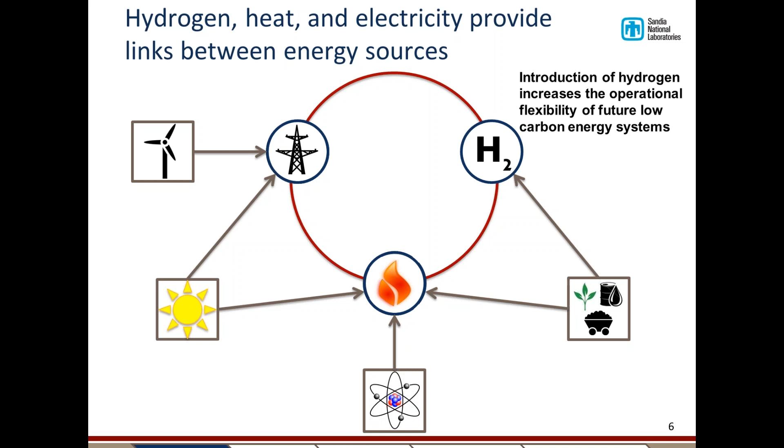The focus of the current analysis is on hydrogen and electricity production from solar energy in the form of heat. So we will be considering cases in which solar energy is collected and converted into heat, and that heat is subsequently converted into either electricity or chemical energy in hydrogen molecules.

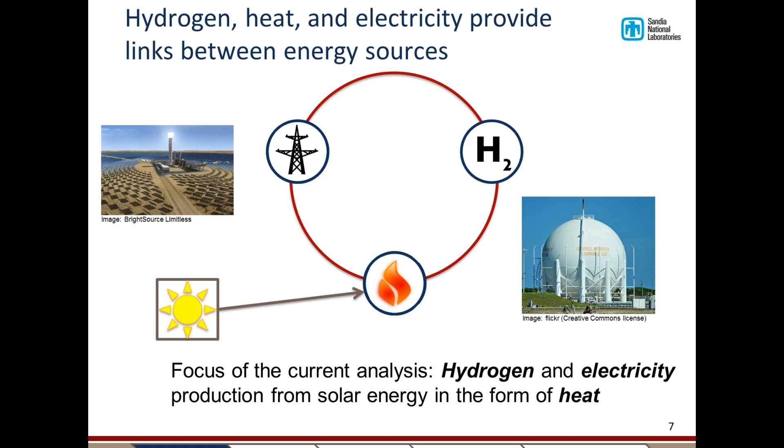As you've already heard, our primary goal was to explore pathways for integrating concentrating solar power and solar hydrogen production. And the key question here is, do synergies exist that could reduce cost? The scope of the analysis was limited to process-level integration of concentrated solar power, which I'll refer to as CSP from here on out, and hydrogen production.

So for example, we did not consider the use of hydrogen for energy storage at a CSP plant, and we also did not consider potential impacts beyond the plant gate, such as changes in hydrogen transportation costs.

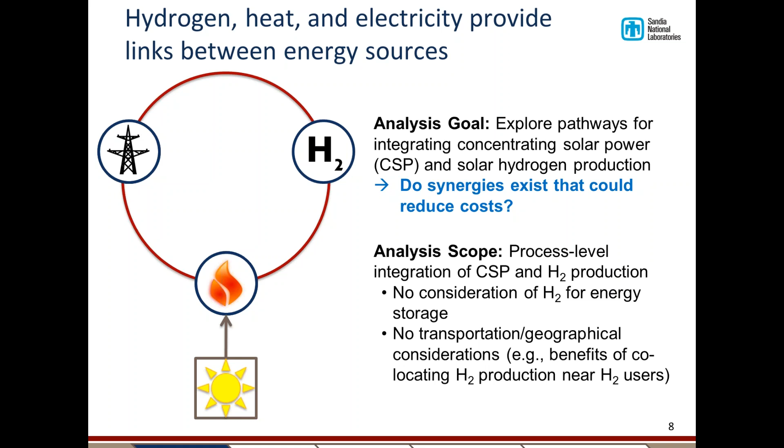This was meant to be a preliminary look at integration of CSP and hydrogen production, and relied heavily on previously published analyses in those areas. On the CSP side, we used published reports and cost and performance models developed primarily at Sandia National Laboratories. These include power conversion calculations and reliability analyses, and capital and operating and maintenance cost estimates.

Some of the key outputs of these analyses are estimates of the levelized cost of electricity from CSP, both for the current state of the technology and for future performance targets. On the hydrogen production side of things, we relied on DOE hydrogen production models, which present discounted cash flow analyses based on conversion efficiency and capital, O&M, and materials costs, with the primary output being the cost of hydrogen per kilogram. These are the DOE H2A models.

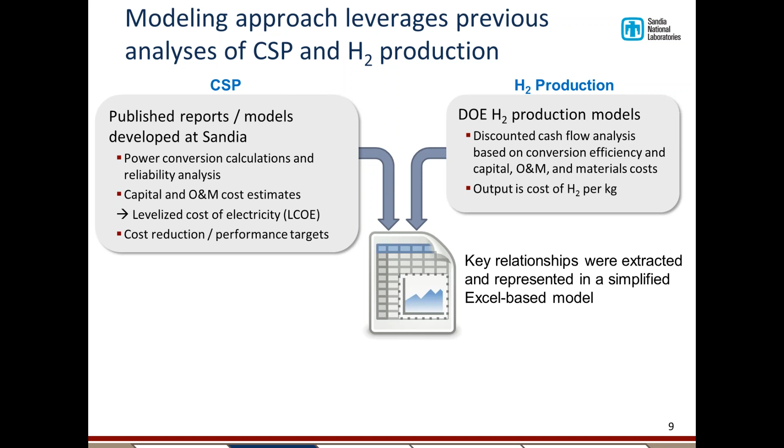In order to conduct our analysis, key relationships were extracted from these documents to construct a simplified Excel-based model of each potential scenario integrating CSP and hydrogen production. Our objectives were to identify important performance drivers and fundamental conditions that favor the integration of CSP and hydrogen production, and to understand the key uncertainties such that we could draw some robust conclusions.

I just want to emphasize that our objective was not to conduct process optimization, as our modeling was conducted at a fairly high level. That being said, I will be showing cost estimates later in the presentation, but I would urge you not to focus on the absolute numbers, but rather try to notice the underlying trends and the conclusions we can draw from them.

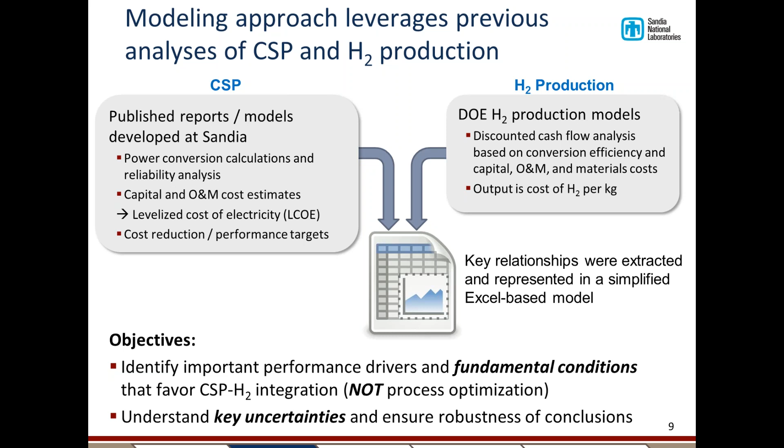Now is a good time to emphasize the fact that we did not make any judgments or assessments of the performance or cost of any components of either CSP or hydrogen production processes. All of the performance and cost estimates were taken directly from the documents mentioned on the previous slide. We simply combined these estimates to analyze potential costs for an integrated facility.

So for hydrogen production, we use estimates from the DOE H2A models, and in particular the future central hydrogen production models, which feature startup years between 2025 and 2030. So again, in the future.

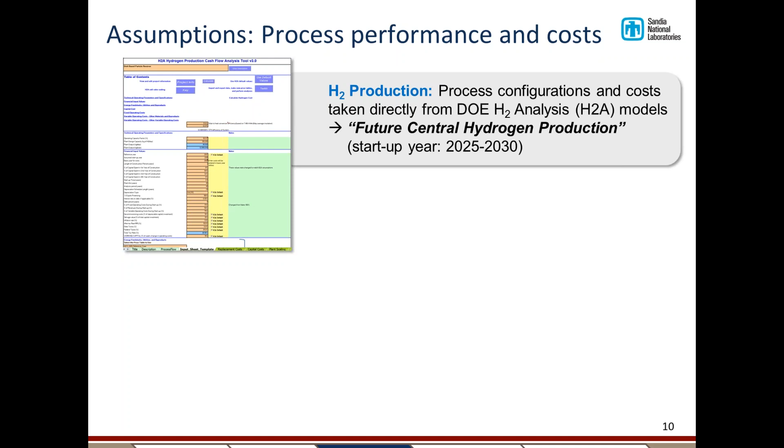For CSP, we used estimates taken directly from DOE and Sandia reports outlining DOE targets for CSP in 2020 under the Sunshot program. Note that for both hydrogen production and CSP, the assumptions are based on future systems projected out to high volumes where economies of scale have been achieved and cost reductions and performance improvements have been realized beyond the current state of the art.

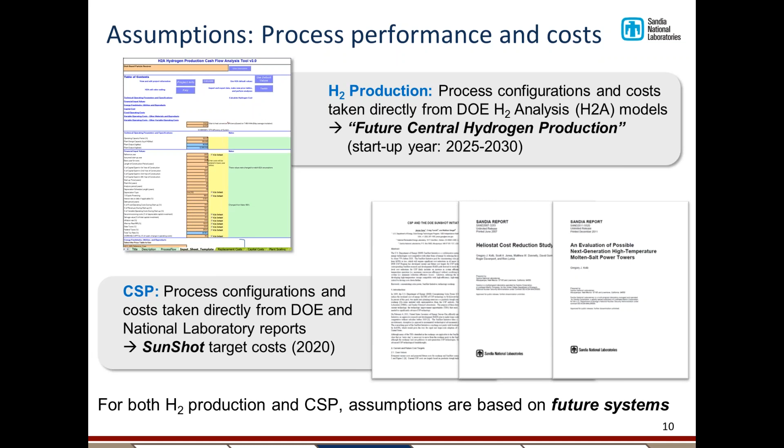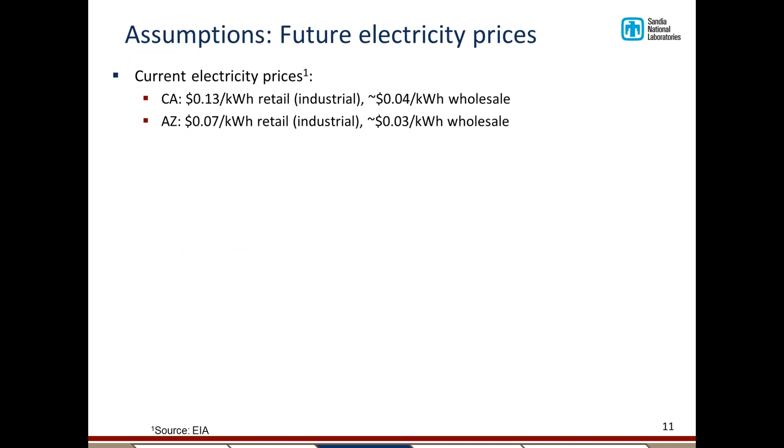As we'll see, another important assumption we'll need to make is regarding the price of electricity. According to the Energy Information Administration, current electricity prices in places with adequate solar resources are somewhere between 7 and 13 cents per kilowatt hour for retail industrial customers, and 3 or 4 cents per kilowatt hour on the wholesale market.

But as we discussed on the previous slide, we're interested in the price of electricity up to a decade or more in the future. And even though solar PV prices have come down substantially over the past few years, there are several factors that could lead to higher electricity prices going forward.

One is potential increases in natural gas prices. With the retirement of many coal-fired plants, the share of natural gas in overall electricity generation has increased, and natural gas prices have historically been fairly volatile. So the stable prices offered by solar electricity technologies could potentially be attractive in this situation.

Another factor is legislation that has been introduced to promote renewable and less carbon-intensive technologies, such as renewables portfolio standards, cap and trade programs like the one in California, and the US EPA's Clean Power Plan. All of these could increase the price at which renewable power is competitive. Finally, if we focus on CSP in particular, we note that this technology is unique in that it enables some amount of energy storage, which could command a premium compared to other renewable technologies like wind and solar PV.

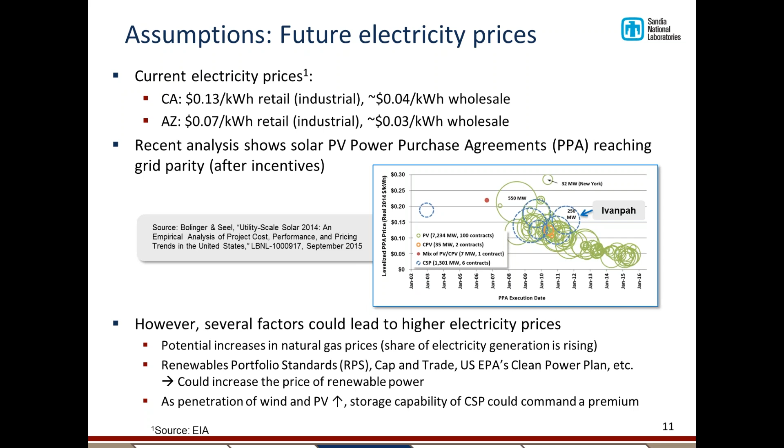The point here is not to conduct a detailed analysis of electricity prices. That's outside of our scope. The goal of this slide is simply to emphasize the fact that future electricity prices are highly uncertain. And because they are uncertain, we treated electricity price as a parameter in our analysis.

So electricity prices enter into our analysis when we consider the electricity being sold by CSP plants and electricity being purchased by hydrogen production plants. We assumed for our analysis that hydrogen plants could purchase electricity at the same price for which CSP plants could sell electricity, just to simplify things.

We also assumed that the CSP and hydrogen production facilities are owned by the same entity, just for our calculations. Our analysis was conducted from the perspective of hydrogen production, so we accounted for the revenue from electricity sales in the calculation of the cost of producing hydrogen. At a very high level, the hydrogen cost was calculated using the expression shown here, and as you can see, the electricity revenue is subtracted from total capital and O&M costs in the numerator.

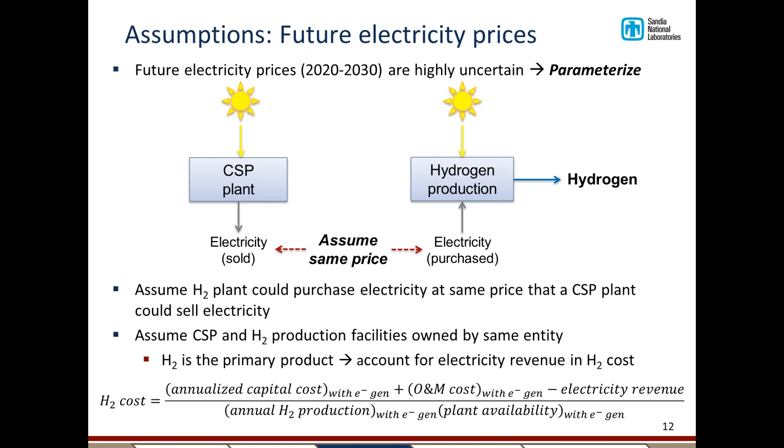Before we get into the actual analysis, I wanted to provide a brief overview of concentrating solar power. For those of you who may not be familiar with this technology, there are actually several different implementations of CSP being pursued, but we are focusing on power tower technology in alignment with the DOE Sunshot program.

Basically, an array of heliostats, or mirrors with two-axis directional control, are used to reflect sunlight onto a solar receiver mounted on a tower. Inside the receiver, heat is absorbed by a working fluid or solid, as the case may be, and transferred to an electricity generation unit. The heat can also be stored for a number of hours if that's desirable.

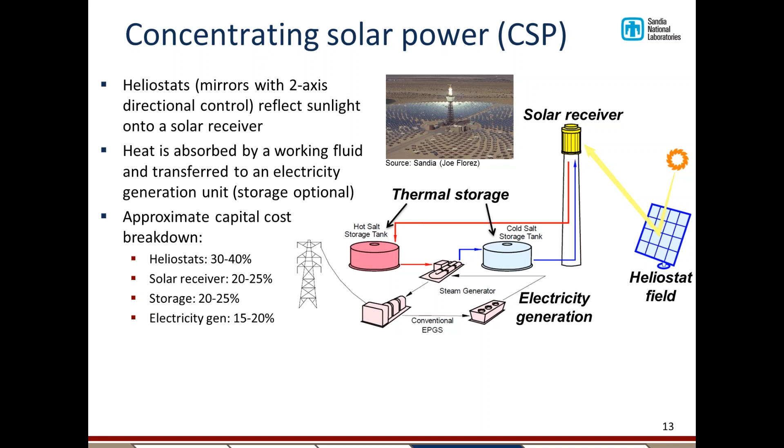If we look at a typical breakdown of capital costs, we see that the majority of costs are for the collection and storage of heat from the sun, with electricity generation equipment accounting for a smaller fraction.

The baseline CSP plant in our analysis is a power tower system with molten salt thermal storage and subcritical Rankine cycle electricity generation. In 2010, a Sandia National Laboratories analysis estimated that the levelized cost of electricity for such a system would be 15 cents per kilowatt hour, and the Sunshot target for this configuration is 6 cents per kilowatt hour in 2020.

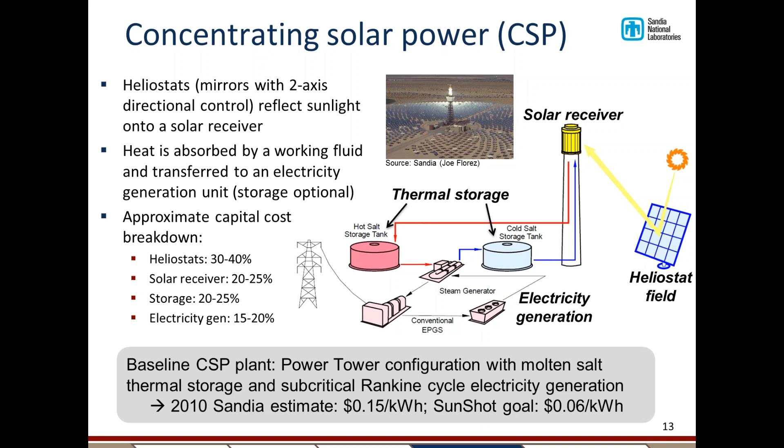We divided the CSP plant into two major units for our analysis. The first is the system that collects light and converts it to thermal energy. This includes the heliostat field, the solar receiver, and thermal storage if it's present. The second unit is the system for generating electricity, including the steam generator, turbine, and cooling towers.

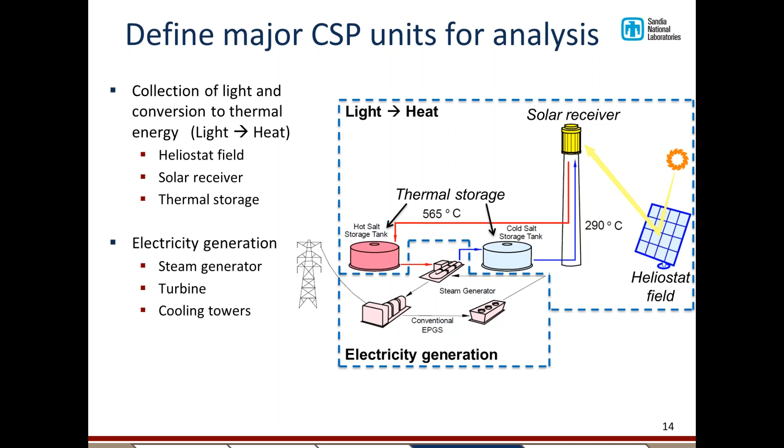You'll see schematic drawings like these throughout the presentation, so just keep in mind that the light-to-heat box here includes components shown in the schematic above. And as I just mentioned, the light-to-heat box represents the majority of CSP costs.

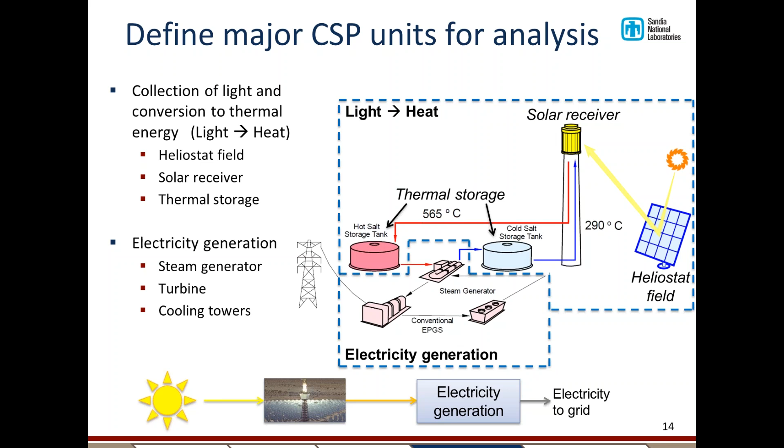So both CSP and solar hydrogen production use heat from the sun, and this heat can be treated as a feedstock in our analysis. The quality of this feedstock is determined by its temperature and also by its availability in terms of thermal storage, again, if it is present.

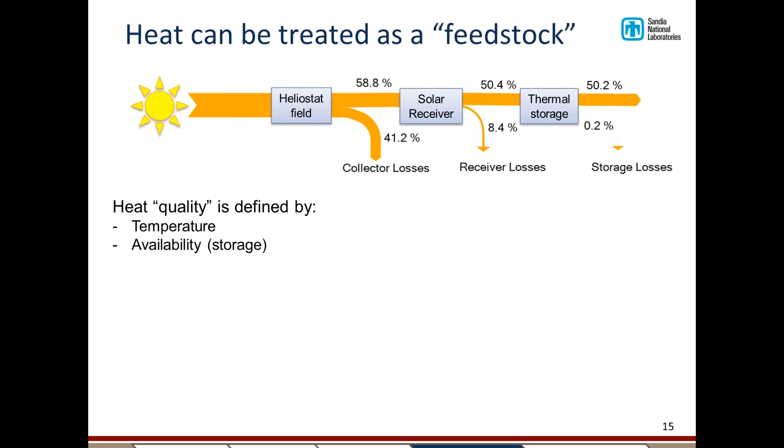The key point here is that as the quality of the heat increases, so does the cost. And this is important because, as we saw on the previous slides, the systems used to collect and store this heat are major costs for solar thermal technologies.

The main reason that the cost of heat increases with temperature is that losses at the receiver become more significant at higher temperature, and that's what's circled up here in the energy flow diagram. In addition, more exotic and expensive materials are required that can withstand the higher temperatures.

So why would we want to go to higher temperatures? Well, at higher temperature, the generation of electricity and the production of hydrogen are both potentially more efficient. So a key trade-off that you'll see in this presentation is that between the efficiency of the collection of solar energy and the efficiency of the conversion of that energy to either electricity or chemical energy in hydrogen molecules.

For the analysis conducted at Sandia in 2010 that I mentioned a few slides ago, they found that the optimal temperature for CSP is 565 degrees Celsius based on their assumptions.

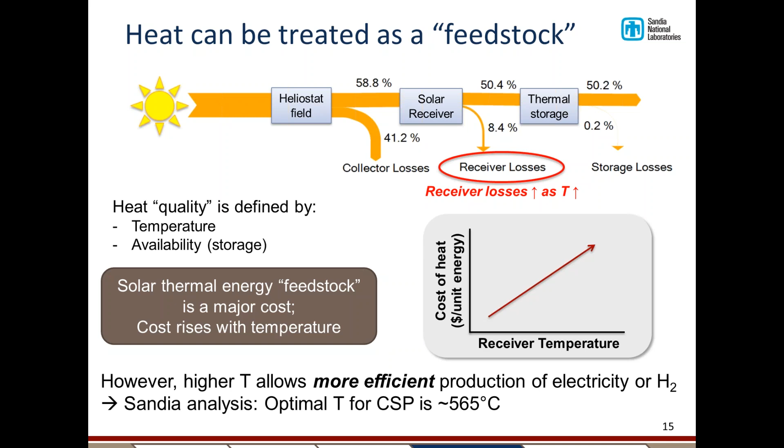As I've said, our goal was to investigate opportunities for integrating hydrogen production and CSP processes in the H2A analyses that were used as the basis for hydrogen production processes. Electricity was purchased from the grid, whereas our analysis considers co-production of electricity from CSP.

Our focus was on process level integration, as I've said. So the key question to ask for each process is, are there any potential synergies at the process level that would make co-location of CSP and hydrogen production attractive? One place to start would be to look for waste heat streams or byproducts from one process that could be fed to the other process.

As we just saw, thermal energy is a major cost, so we focused on integrating heat streams between the two processes.

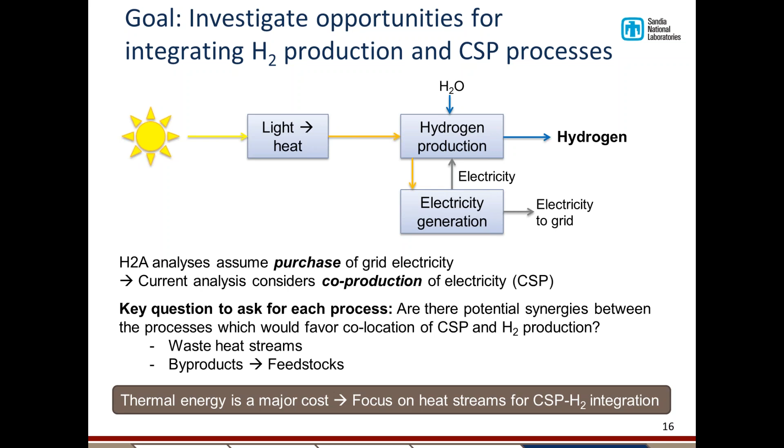Taking a closer look at the electricity generation portion of a CSP process, we see that it yields a few byproducts that could potentially be used by another process. This is a very mature technology with extremely efficient internal heat integration, so waste heat exits the system at a fairly low temperature, roughly 40 to 60 degrees Celsius. Water is the working fluid in a closed cycle, so there are no significant material byproduct streams that could be utilized by another process.

Essentially, this means we'll need to look to the hydrogen production processes for integration opportunities if we'd like to utilize waste streams as inputs.

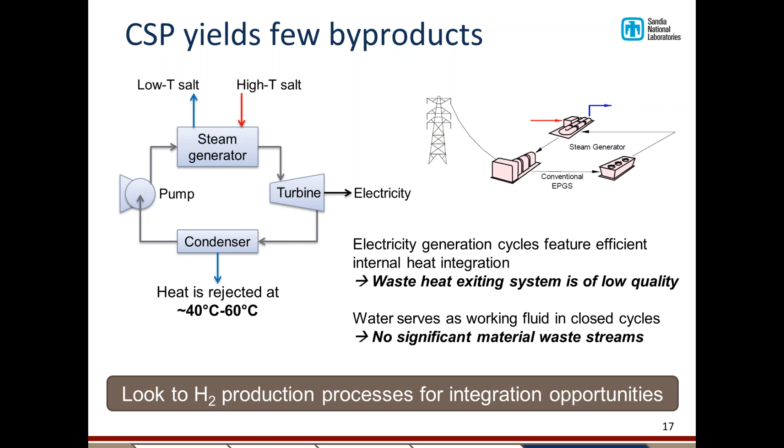With that, we're ready to move to the actual scenarios that we explored for integrating CSP and hydrogen production. Three scenarios were chosen based on three different hydrogen production technologies.

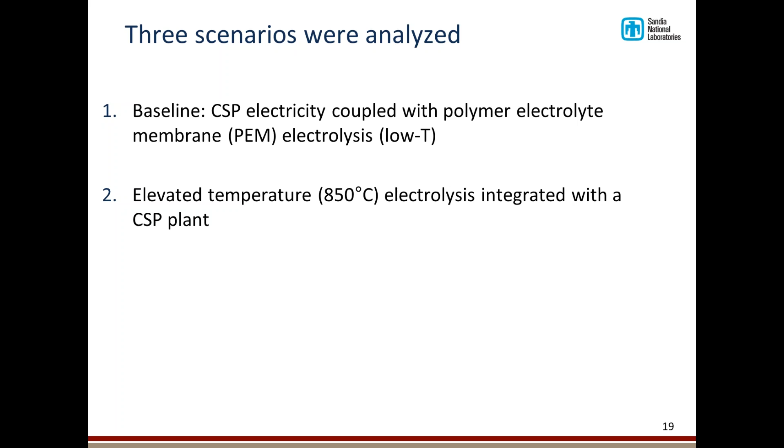The first was our baseline scenario, featuring CSP electricity coupled with polymer electrolyte membrane electrolysis at ambient temperature. Our second scenario was based on elevated temperature electrolysis integrated with a CSP plant. And our third scenario was based on high temperature metal oxide thermochemical hydrogen production integrated with a CSP plant.

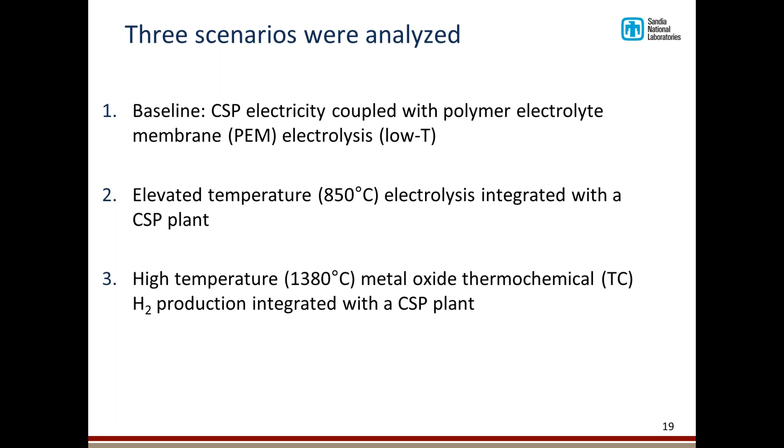This is a relatively mature technology that converts electricity into chemical energy in hydrogen molecules. Since the process takes place at ambient temperature, no heat input is necessary.

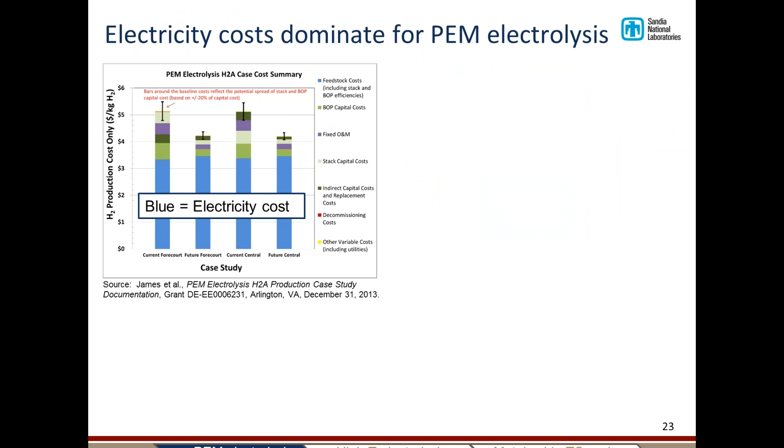Here we see just how much electricity costs dominate the PEM electrolysis scenario. On the left, we see a plot similar to what we saw several slides ago, and in fact the data shown then are the same as the fourth bar here, labeled Future Central. I apologize that the color scheme is different here. It's fairly obvious that PEM electrolysis requires low-cost electricity in order to be competitive.

The plot on the right shows the current and future hydrogen cost based on H2A data for a range of electricity prices. I've also indicated the estimated costs at two different values of electricity price. First, an estimate of 15 cents per kilowatt hour came from the 2010 report published by Sandia, and 6 cents per kilowatt hour is the Sunshot target for CSP in 2020. It's clear that electricity prices on the high end of this plot will be problematic for PEM electrolysis.

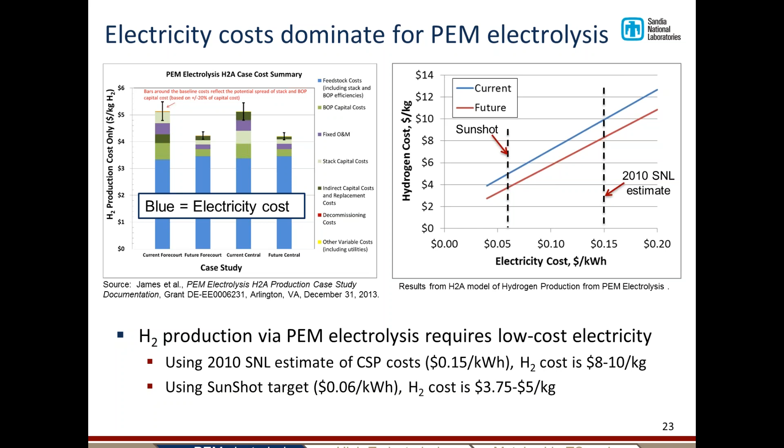PEM electrolysis was our baseline case, as I said, but there are really no obvious opportunities for directly integrating this technology with CSP. So let's now examine high temperature electrolysis, which does provide some of those opportunities.

In the high temperature electrolysis process, a portion of the energy required for electrolysis can be supplied as heat, and this increases the overall efficiency of the hydrogen production process.

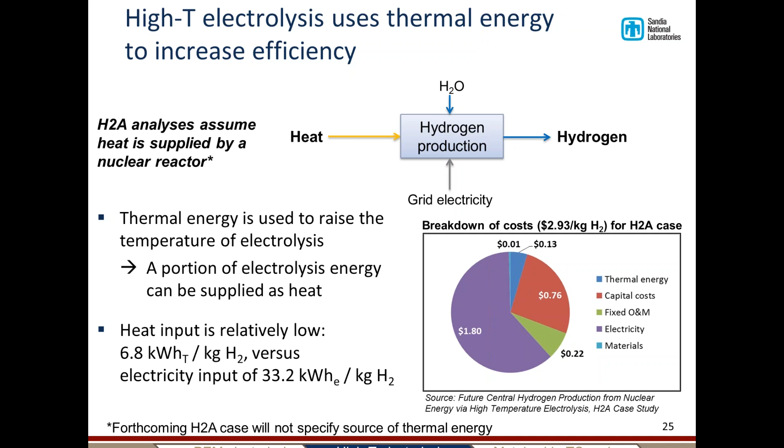The H2A high temperature electrolysis case assumes nuclear-based thermal energy, as I just said, and it also assumes that electricity will be purchased from the grid. For our analysis, we assume that solar energy is utilized to provide both the heat and electricity needs of the process. So we assumed solar receivers with an output of 340 megawatts thermal would be used, and that's from the previous Sandia report that I referenced.

This size power tower would supply a total amount of heat that is similar to the H2A case based on nuclear power. And the solid particle receivers in these towers would be able to provide heat at roughly 850 degrees Celsius, which is similar to the temperatures that would be available from a nuclear reactor.

Two key factors to keep in mind as we explore integration options are that electricity consumption is high, and also that the process yields low temperature waste heat that is not particularly valuable for other processes. So how can we integrate this technology with CSP?

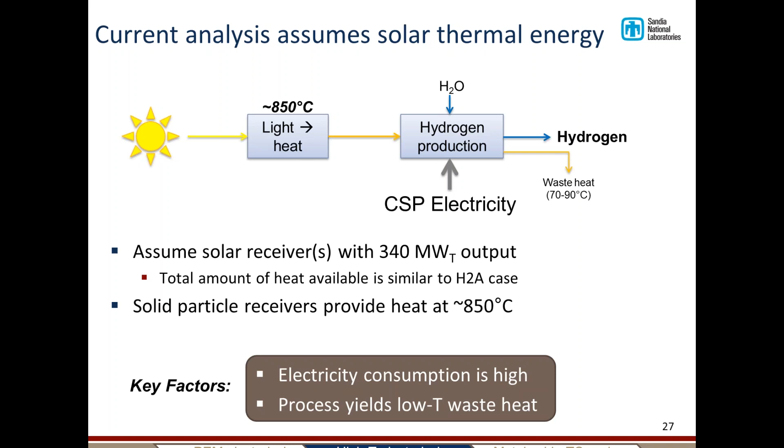One option, which we call case one, would be to construct a single tower dedicated to providing thermal energy and multiple additional CSP towers to provide electricity. In this case, 11 additional CSP towers would be necessary to supply electricity, for each tower supplying exclusively heat for hydrogen production. And there's no process level integration of hydrogen production and CSP.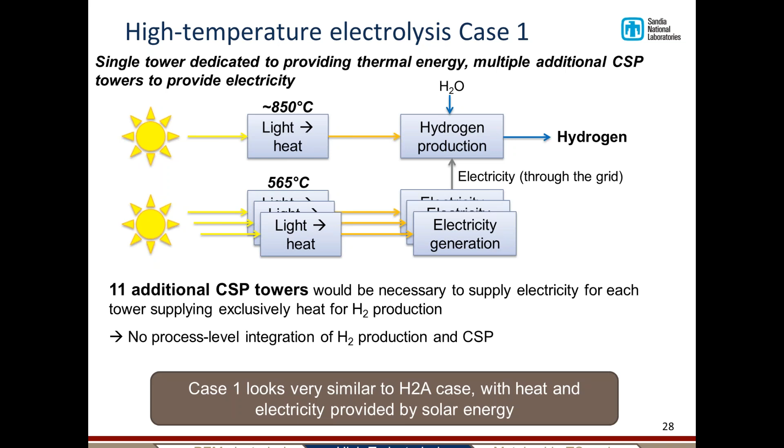Thermal energy for electricity generation is at a higher temperature than would normally be expected for a CSP process, so electricity generation efficiency would be higher. However, the cost of collecting that thermal energy is also higher, as we discussed previously.

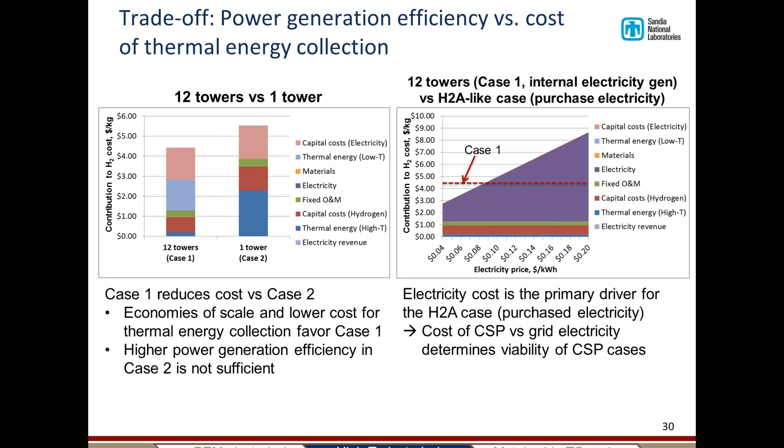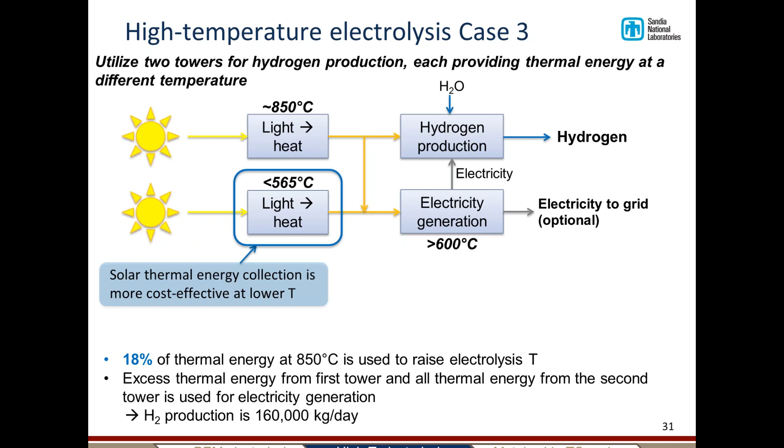We also looked at one other high-temperature electrolysis case in addition to case 1 and case 2. In case 3, we utilized 2 towers for hydrogen production, each providing thermal energy at a different temperature. So 18% of the thermal energy collected at 850 degrees C is used to raise the temperature of the electrolysis, and the remainder is combined with thermal energy from a second tower collected at a lower temperature to generate electricity. In this configuration, solar thermal energy is collected at a lower temperature in the second tower, which is less expensive, but at the same time, electricity generation is carried out at a higher temperature than our baseline CSP plant, which increases the efficiency from 42% to 48%.

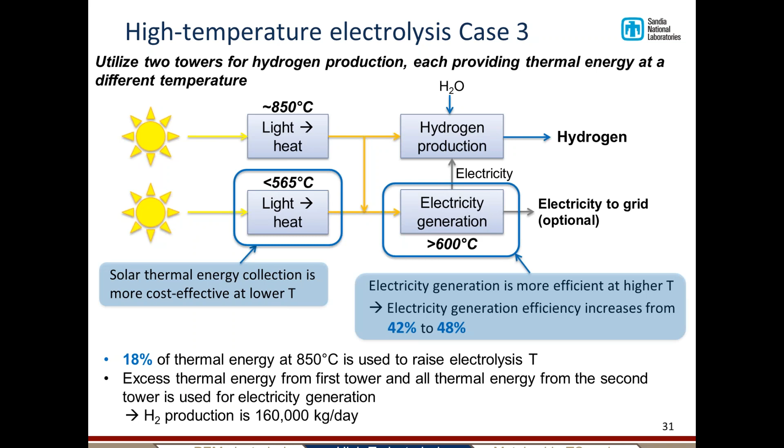Before we get to the results for case 3, I wanted to take a minute to highlight the fact that combining heat from multiple towers does have precedent in industry. Specifically, eSolar has taken a modular approach to CSP in which their total plant output is deployed in 12 megawatt thermal or 50 megawatt thermal increments. So a similar approach could be taken in collecting heat from multiple towers, producing hydrogen and electricity, as we do in case 3.

Okay, so here we see the results from all 3 of our high temperature electrolysis cases, and one conclusion we can draw is that the operation of multiple towers at 2 different temperatures reduces hydrogen cost. Case 1 with the 12 large towers remains the lowest cost option due to economies of scale and cost-effective collection of thermal energy at temperatures that are optimized for both hydrogen production and electricity generation. Case 3 reduces cost versus case 2 due to increases in efficiency of thermal energy collection and conversion to electricity, but it still doesn't match the cost of case 1.

That being said, there may be some optimum configurations somewhere between case 1 and case 3. In reality, one could vary the number and sizes of both high and low temperature towers at a given site, and that optimization would lead to the lowest possible hydrogen cost. Here we selected 3 representative cases to illustrate the key factors we need to consider. So without conducting such an optimization, it's difficult to say whether there is any potential advantage to co-locating CSP with high temperature electrolysis processes.

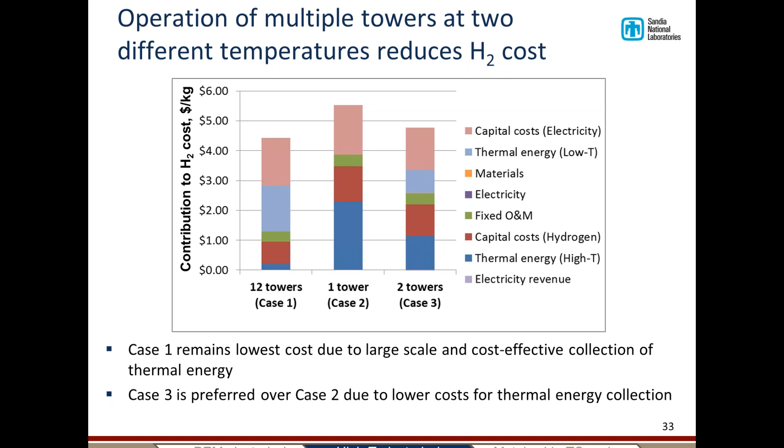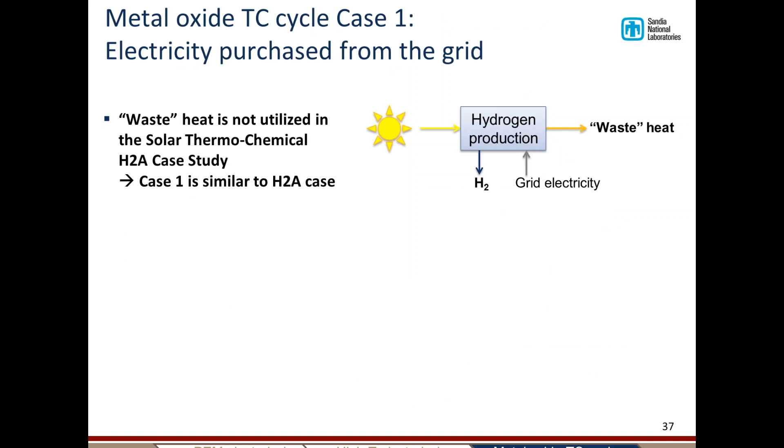Here we see a breakdown of the cost from the H2A model, and we see that electricity is a relatively minor cost. It's mainly required to run compressors and other equipment in the hydrogen production plant, and also to move heliostats. The main costs are related to the collection of thermal energy, as you can see here.

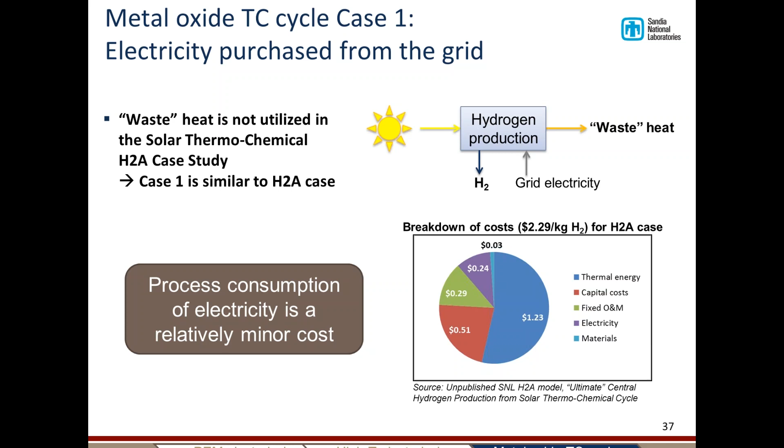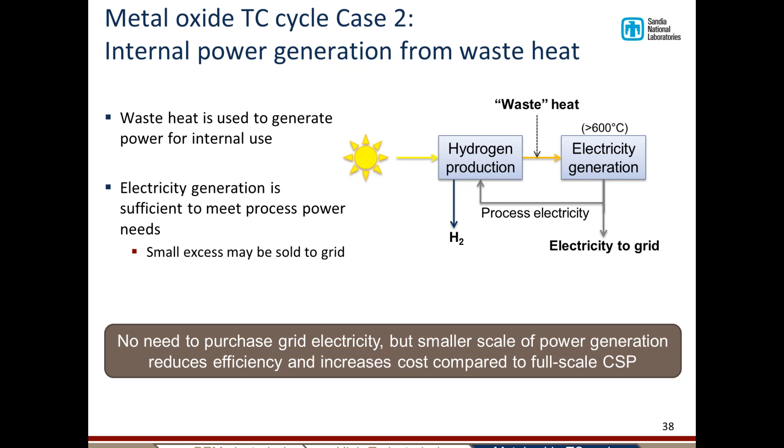Here we see results for case 1 and case 2, again with electricity price on the x-axis. For case 1, the hydrogen production cost increases as electricity price increases, and for case 2, the opposite is true, since electricity revenue increases. It's difficult to see the total hydrogen production cost from the bottom plot, since this purple section is electricity revenue that should be subtracted from the other costs.

So I plotted the total hydrogen cost for both cases on the plot to the right. You can see that the electricity generation from waste heat in case 2 reduces hydrogen cost if the electricity price is greater than about 7 cents per kilowatt hour. But electricity is a relatively minor cost for this process, so you don't see significant benefits until the price reaches about 10 cents per kilowatt hour.

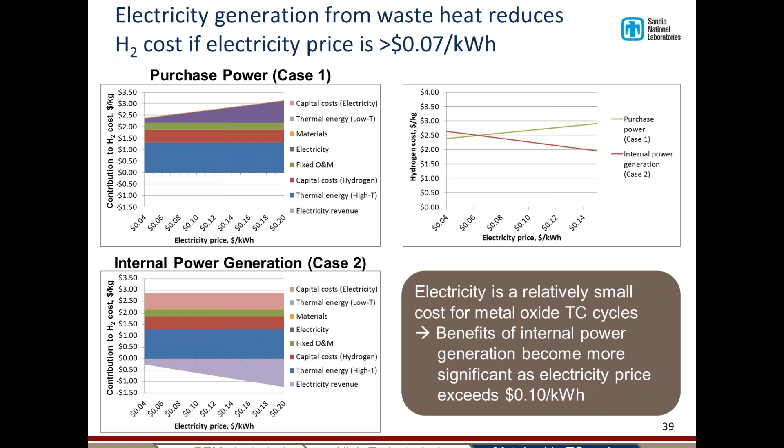We also investigated one other option, case 3, which integrates the metal oxide cycle with a traditional CSP plant. In this case, the excess thermal energy from the metal oxide cycle is combined with the thermal energy from a typical CSP tower. So in an optimized CSP plant, solar thermal energy is collected at a lower temperature than the 1500 degrees that we're considering for metal oxide cycles, and that leads to lower costs for collecting that heat.

However, since the high temperature waste heat from the metal oxide cycle is combined with the heat from the low temperature CSP tower, the temperature of electricity generation is increased, and that leads to an increase in efficiency from 42 to 48%. So not only are we utilizing heat that would normally be wasted, that heat is being used to increase the efficiency of the entire electricity generation process. So by doing so, we're essentially amplifying the value of that waste heat.

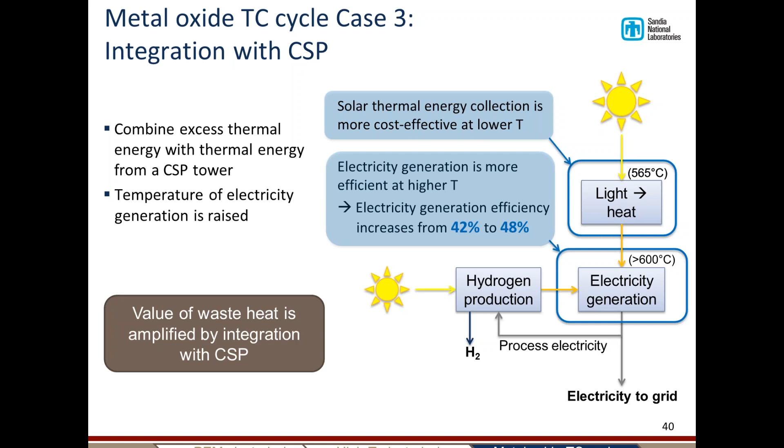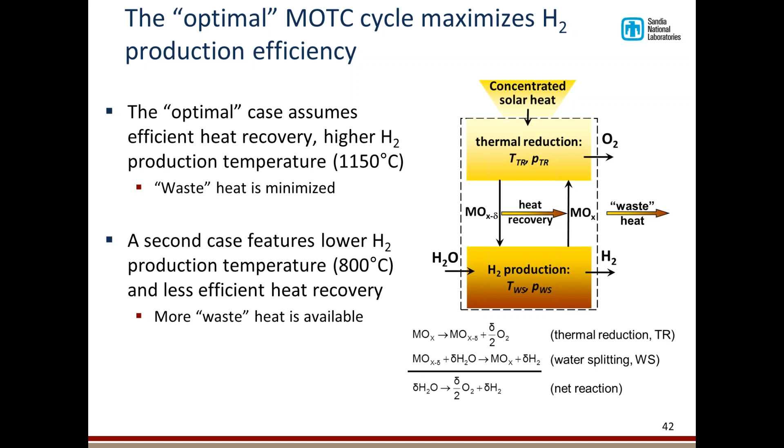If you recall, in our first metal oxide thermochemical cycle case, no electricity is generated within the process. If we compare the results for an optimal case and a less efficient process with more waste heat, we're not surprised to see that the optimal case results in a lower hydrogen production cost. That's what we would expect to happen.

However, in our other cases, waste heat is utilized to generate electricity within the process, and this makes the less efficient process look more attractive. Although the less efficient hydrogen process has higher capital cost and larger thermal energy input for a fixed hydrogen production quantity, this is offset by an increase in electricity revenue.

If we look at overall hydrogen production cost, we see that the less efficient hydrogen process, denoted by the dashed lines in the plot, actually results in lower hydrogen costs for most values of electricity price for both case 2 and case 3. Thus, we see that potential synergies do exist between CSP and metal oxide thermochemical cycles, and these synergies look particularly attractive at earlier stages of hydrogen technology development, that is, for processes that have more so-called waste heat. This excess heat should be viewed as a potentially valuable byproduct of the hydrogen production process, one that would definitely have value for a co-located CSP process.

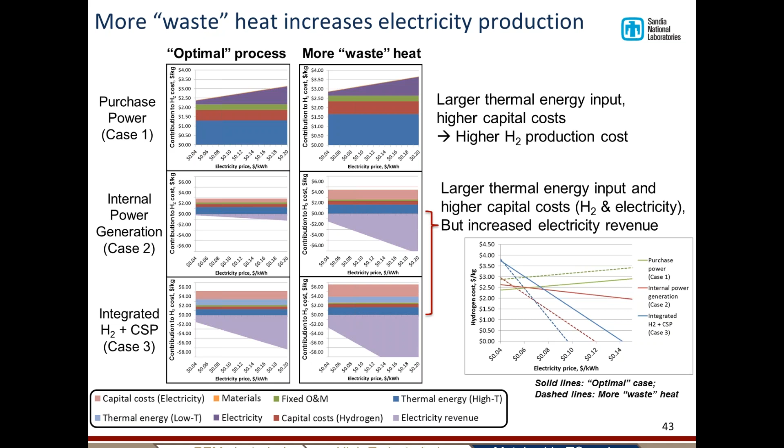So the previous slide contained the last set of results that I will present today. Before I move to questions, I'd like to end with the key conclusions and insights that I hope you'll take away from today's presentation.

But before I get to those, I'd like to reiterate my previous statements about the uncertainty and sensitivity of the results I've shown today. The solar hydrogen technologies I've discussed are obviously at an early stage of development, and the cost and performance of these technologies 10 or 15 years in the future are highly uncertain, to put it mildly. At this point in time, detailed process optimizations are frankly premature.

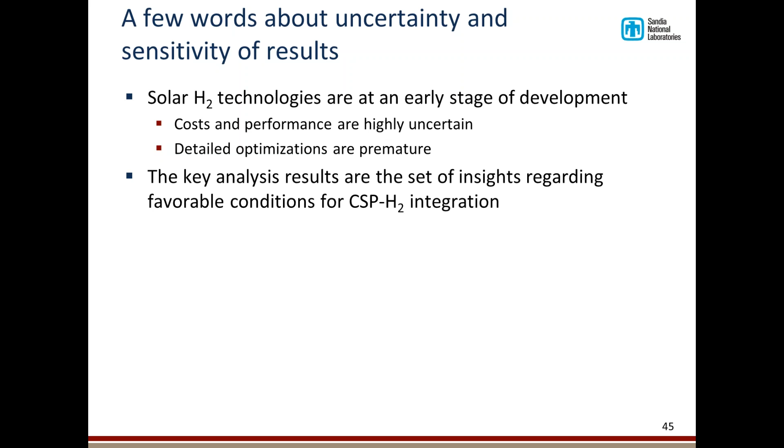That being said, I did present cost numbers today, but in my view those are not the results of our study. The real results of the analysis are the set of insights regarding potentially favorable conditions for the integration of CSP and solar hydrogen production. I do believe these results are robust—they are driven by the inherent characteristics of the processes, and are unaffected to a large degree by the uncertainties in absolute hydrogen production costs.

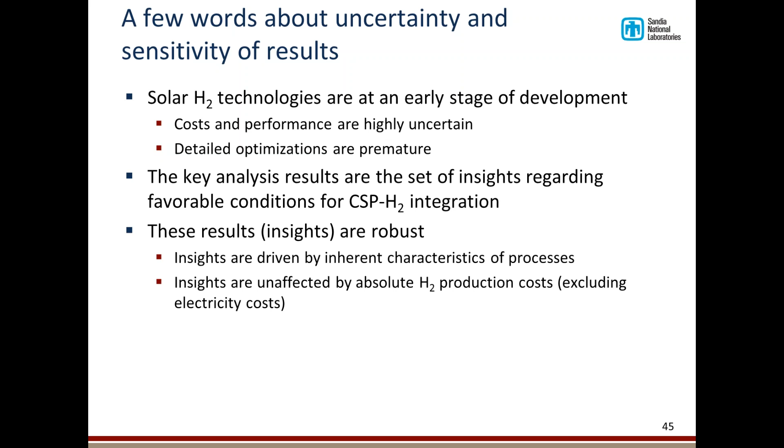Okay, so let's begin with a few general conclusions. These may not seem extremely insightful, but I believe they are worth mentioning since they will drive the more specific conclusions I'll discuss in a few moments.

First, we saw that the collection of solar thermal energy is a significant cost for both CSP and solar hydrogen production. The efficient collection and use of this energy will be crucial in order to make these technologies competitive, and thus heat integration is a potentially attractive strategy for improving the performance of both CSP and hydrogen production.

Any heat integration strategies must account for the fact that the optimal temperature of a CSP process is lower than that for hydrogen production. If we pursue heat integration between CSP and hydrogen production, we soon realize that CSP does not yield significant waste heat or material byproducts, so we'll need to look to the hydrogen production processes for potential heat flows.

And finally, we saw that electricity prices have a significant impact on our results. Our study was conducted from the perspective of hydrogen production, and in this case, integration with CSP is favored when electricity prices are high, and especially if they are higher than the CSP price.

Before I move on to conclusions related to specific technologies, you'll recall that we briefly touched on hydrogen production via PEM electrolysis, but there really is no significant potential for integration with CSP since there is no input of thermal energy required, and there are no waste streams of potential value for CSP. So the connection is solely through electricity prices, since the economics of PEM electrolysis are driven by the price of electricity to a large extent.

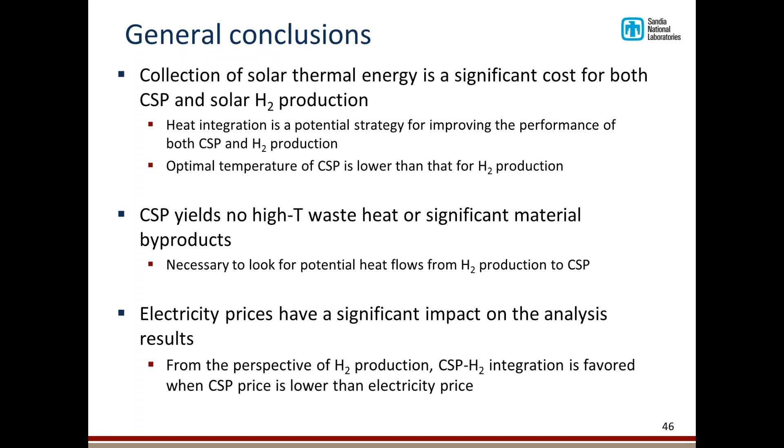Focusing on high temperature electrolysis, this process is characterized by a relatively small input of thermal energy compared to its electricity needs. So most of the solar thermal energy collected in an integrated process will be used for the production of electricity, and that's an important point.

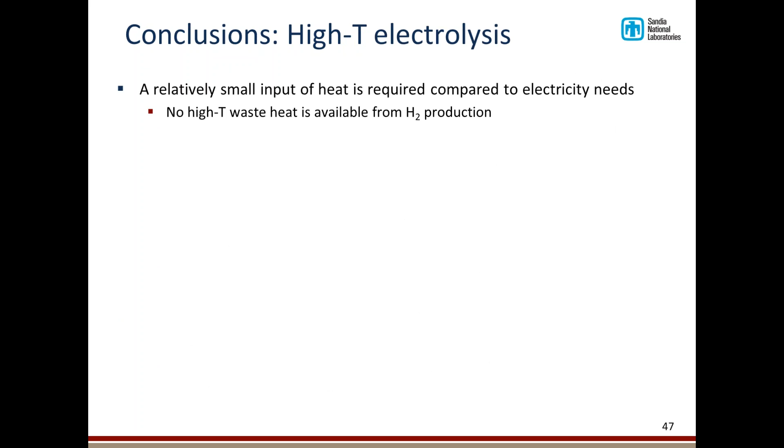Because only a small fraction of the total thermal energy is collected at the higher temperature for the hydrogen production process, the optimal configuration will likely feature multiple towers at different temperatures. This would lead to more efficient collection and conversion of thermal energy. The exact number of towers and extent of heat integration would need to be optimized on a case-by-case basis.

It's possible to have essentially separate CSP and hydrogen production facilities in which only electricity is passed between the processes. It's also possible to divert some high temperature heat from the hydrogen production process to raise the efficiency of electricity production in the CSP plant. Again, this will be driven by local conditions to a large extent.

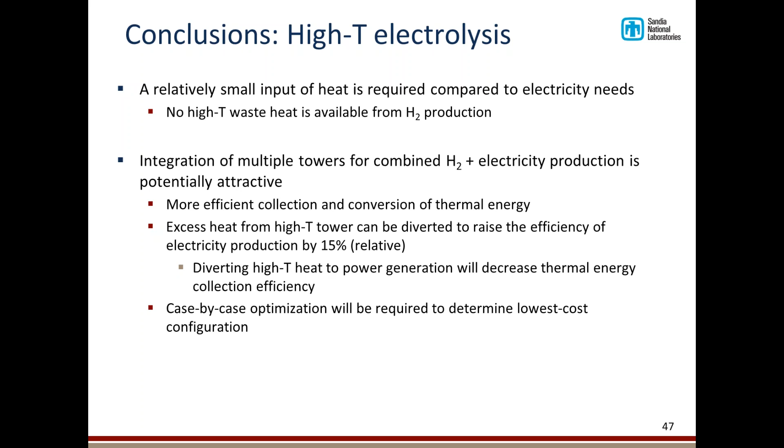For metal oxide thermochemical cycles, unlike high temperature electrolysis, the electricity demand of the process is relatively small, and in fact the amount of high quality waste heat from the process is likely to be more than enough to supply all the internal process heat and power needs.

However, if we consider a standalone hydrogen production process with no integration with CSP, because the electricity demand is relatively low, whether or not the waste heat is used to generate process electricity or the electricity is purchased from the grid has only a small impact on hydrogen production costs unless grid electricity is expensive.

If we consider hydrogen production processes integrated with CSP, there are potential synergies that may be attractive. The waste heat from hydrogen production could then be used to increase the efficiency of the entire electricity generation step by roughly 15% on a relative basis, and this essentially amplifies its value.

So in simple terms, we can view the waste heat from the hydrogen cycle as a byproduct that would be potentially very valuable to a co-located CSP plant.

Finally, we revisited some of our assumptions regarding the thermochemical hydrogen production cycles. We might expect that in the near term, metal oxide cycles would generate significantly more high-quality waste heat than would be available for use in a CSP plant. This can be viewed as a potential revenue stream as the technology continues to develop, so perhaps a bridge to the future.

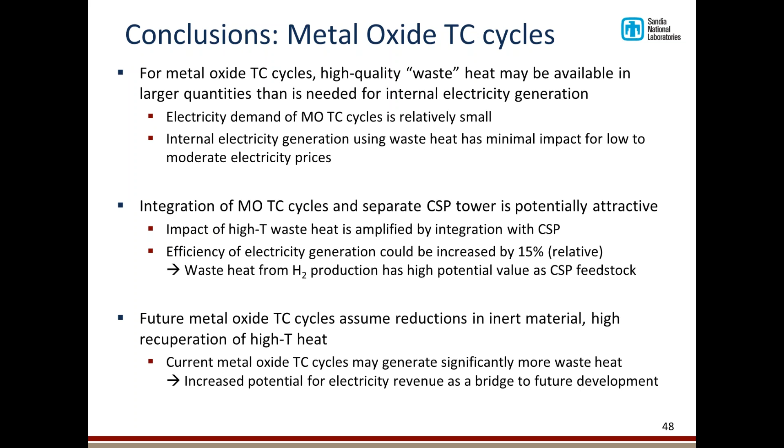So that concludes my presentation.

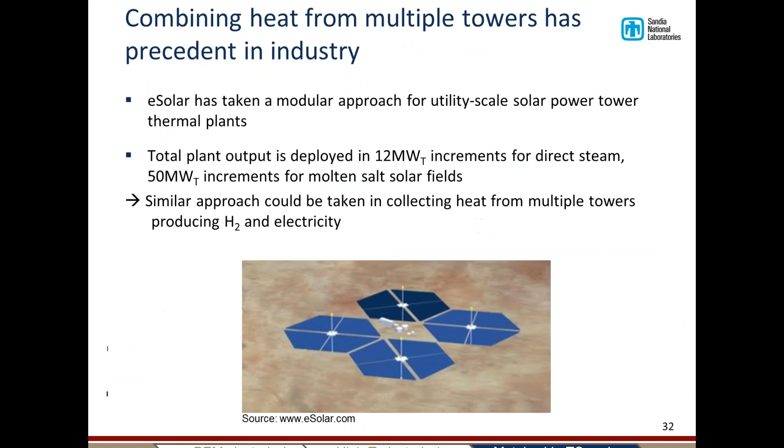Okay, thanks Ivan. Scott, I've got a specific question on a specific slide. There's a question on slide 20. Maybe you could go to that. On slide 20, what is the size of the plants analyzed in terms of kilograms per day hydrogen produced? Also, as electricity usage for hydrogen production decreases across cases, what happens to the electricity not used for hydrogen? For example, the delta in electricity between low temperature PEM and thermochemical cycles.

Okay, on slide 20. I would have to get back to the questioner on this. These were taken directly from the H2A cases, so they are available on the DOE website. But I don't recall what the assumptions were for these particular H2A cases. And in terms of the question about the electricity, if I understand it correctly, these processes all are purchasing electricity from the grid. So they are purchasing just enough to run their processes, and none are being generated by these processes. Did I understand that question correctly?

I think you're right, and I think that all of these cases were based on central production models. So we can come up with it. We have a range of what they were, but we can dig up those cases pretty quickly and probably come up with the kilograms per day for each of these. Right, and if I recall, they were on the order of 100,000 kilograms per day, if that sounds right to you, Eric. So yeah, they may be different in the three cases, but they're all the same order of magnitude. We can get that in a few minutes. We'll dig that up. Let me ask a couple of other questions that have been posed.

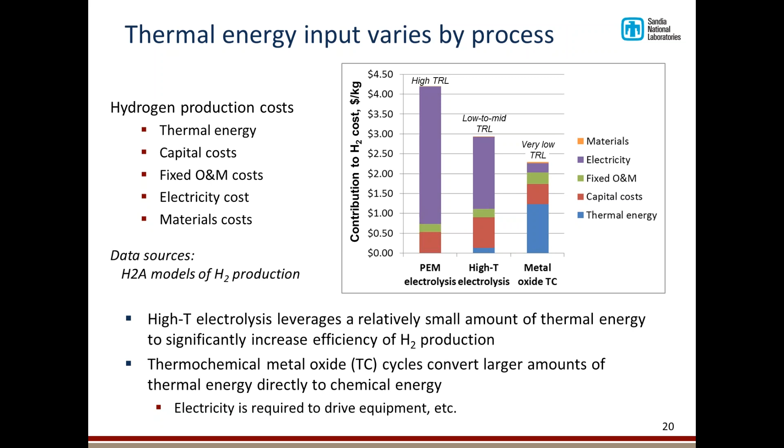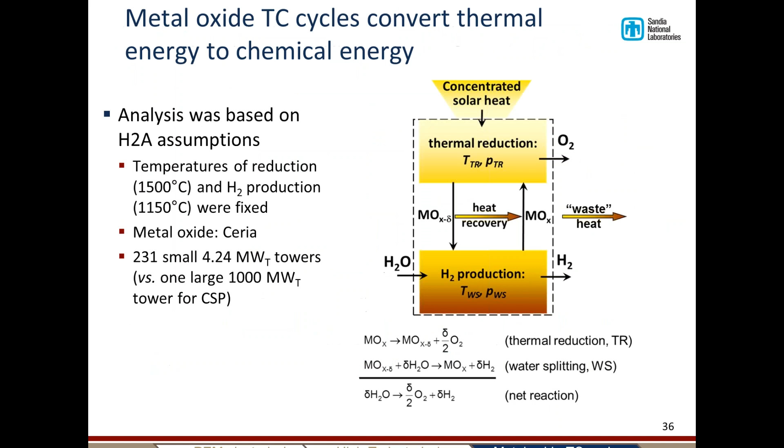Thanks, and that shows up on several other slides of the scenarios. Yes, and it's all about relative directions as opposed to absolute cost, as you've answered. Exactly. You could look at it in a different way. You could look at it and say the process is producing waste heat, and that heat can be sold to an adjacent CSP plant, and that CSP plant could be considered a separate entity that would purchase that heat. So it's just the way that we drew our boundaries and the way we set up our analysis, really, that generates this result.

Great, thanks. And let me get a few more questions in the last few minutes here. Has any research been done on PV-generated excess or non-peak electricity as input for electrolysis and fuel cell storage?